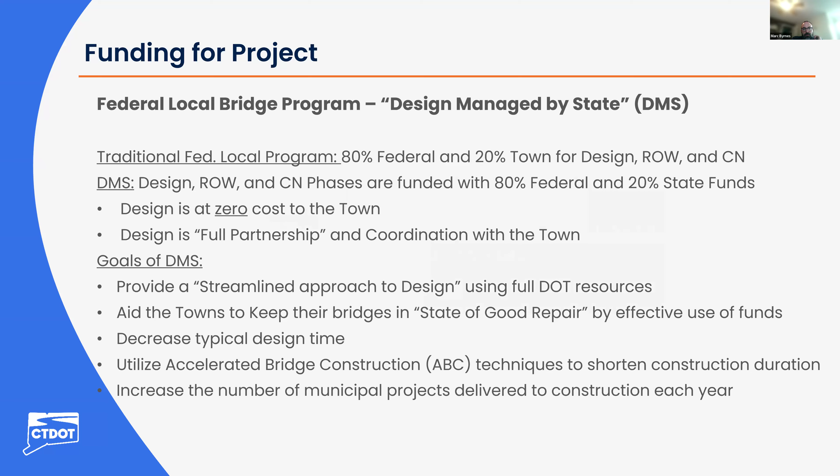I will now turn it over to Jack Healy, Public Works Director for the town of New Milford, for some remarks. Thank you, Mark. Good evening. Mayor Bass could not make the presentation tonight, so I'm going to step in for him to give the remarks. Welcome to this presentation for the Wheaton Road Bridge.

This would be the fourth bridge that we've partnered with DOT on in this fashion. We finished the Upland Road Bridge last year, and I think it was a very big success. It looks very good, and it was done per the schedule that Mark indicated. Again, this is at 100% federal and state costs - the town of New Milford does not pay anything for this. It's a very good partnership. We're able to accelerate the design and construction of these bridges.

We also have the Van Car Bridge and Sand Road Bridge currently going through the program. So the town of New Milford, at the end of the day, will have had 4 bridges in the last year up through 2026 go through this program. So we thank Mark and all of the team on this call for their guidance and helping us get these bridges done in a timely fashion at no cost to the town of New Milford. Thank you.

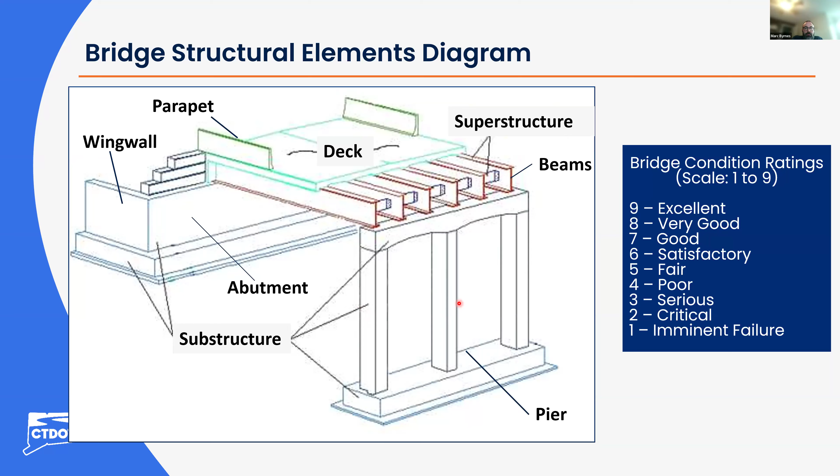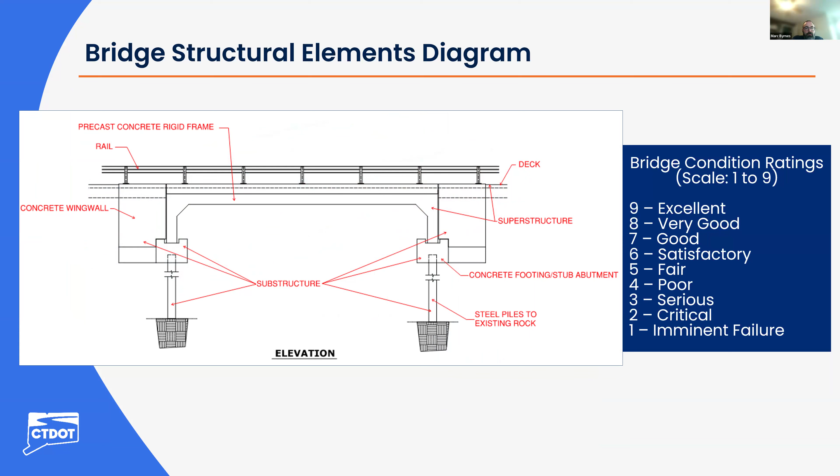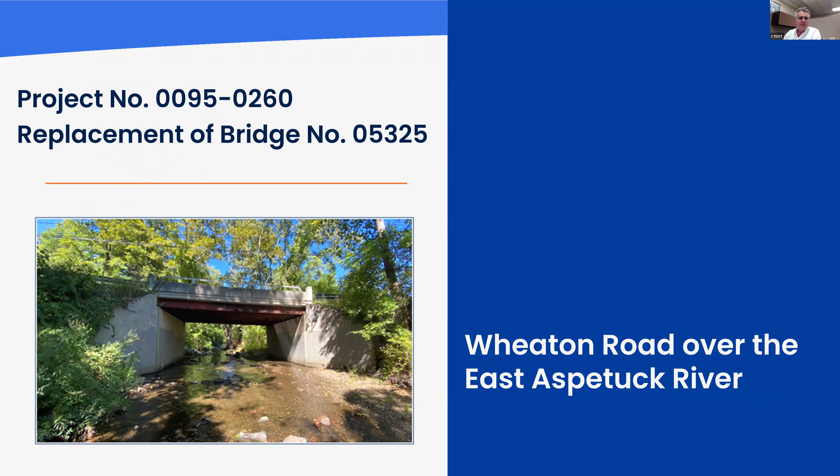Bridge 5325 carries Wheaton Road over the East Aspetuck River, about 300 feet east of US Route 202, which is also Litchfield Road. This bridge is also less than 50 feet east of Old Mill Road, which is a narrow gravel road along the west riverbank. Wheaton Road is functionally classified by the Department of Transportation as a local urban street.

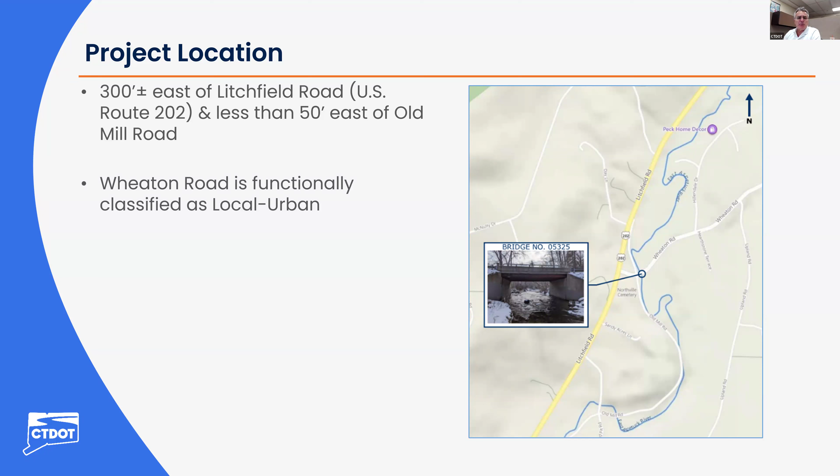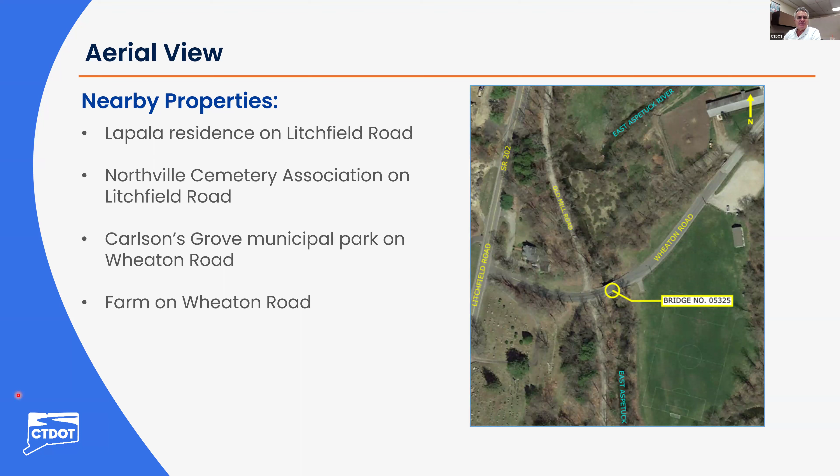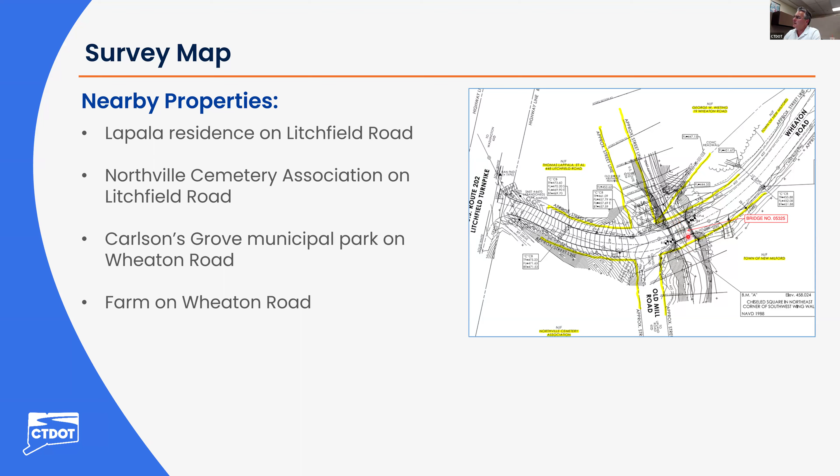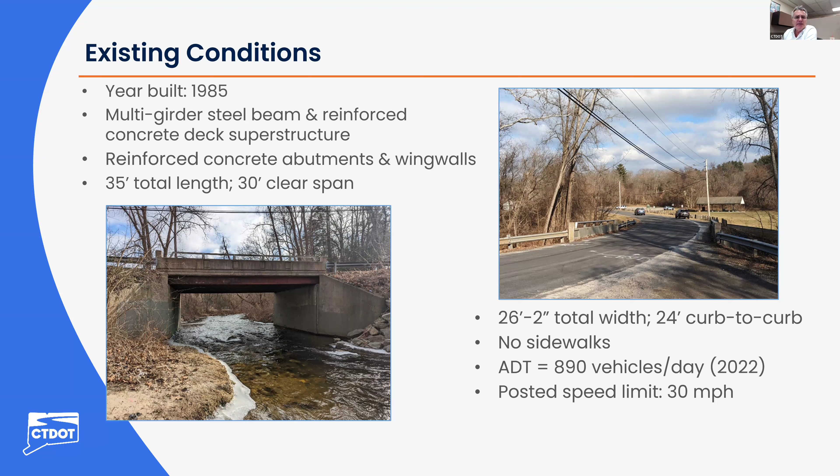There are no sidewalks on the structure or in the project area. The average daily traffic flow on this bridge is about 890 vehicles per day, and the posted speed limit on Wheaton Road is 30 miles an hour. In terms of existing utilities, there are some utility wires located directly over the bridge, just south of the center line of Wheaton Road.

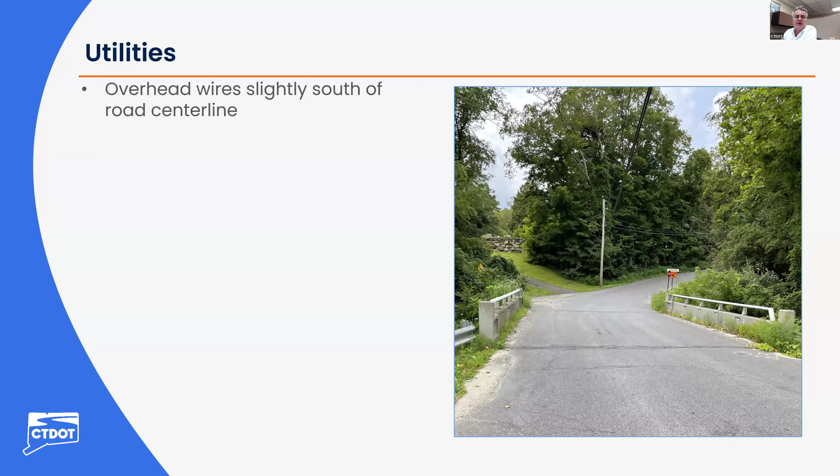In terms of the condition of the bridge, I'll talk about how the department sees this bridge. The approach is in satisfactory condition with a rating of 6. The metal beam railing along the approaches are damaged in a few areas, and the pavement exhibits some raveling and evidence of past chip seal application.

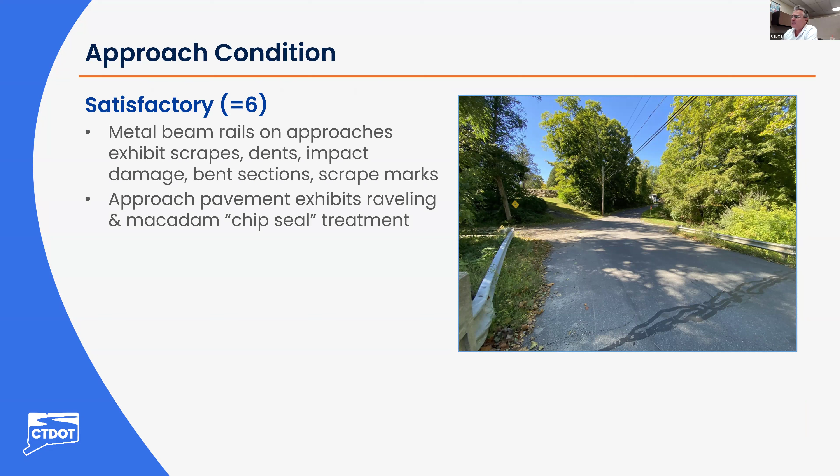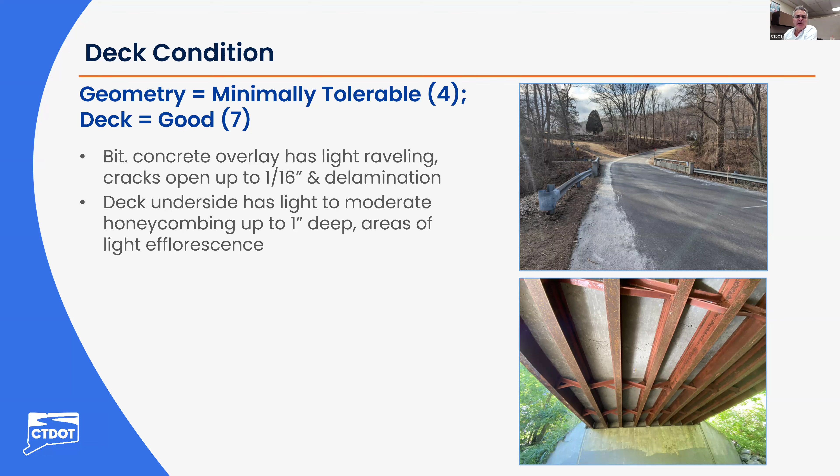The deck geometry has an appraisal rating of 4, meaning it's tolerable to be left in place as is. From a structural standpoint, the deck is in good condition. There are areas of light raveling and cracks in the bituminous concrete overlay, and the concrete deck underside has light to moderate honeycombing and areas of light efflorescence.

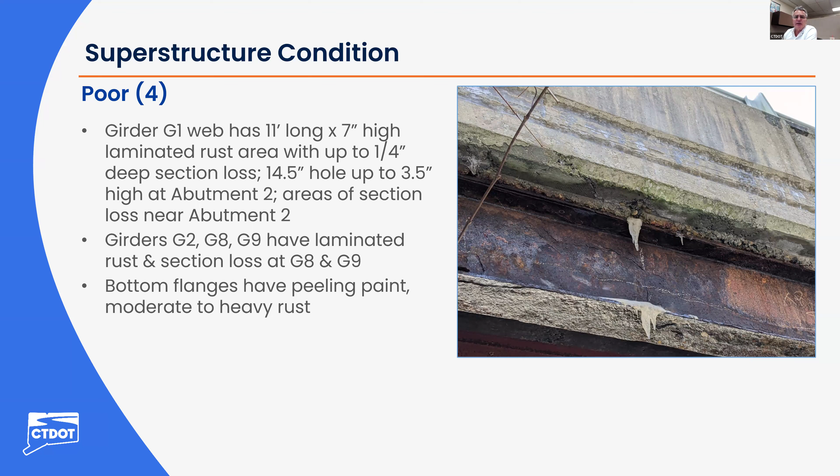The superstructure, however, is in poor condition with a condition rating of 4. Girder G1, shown in the photo, has an area of laminated rust 11 feet long by up to 7 inches high, with up to a quarter inch of deep section loss. This girder also has a hole in it, 14.5 inches long, up to 3.5 inches high, over the bearing at abutment 2.

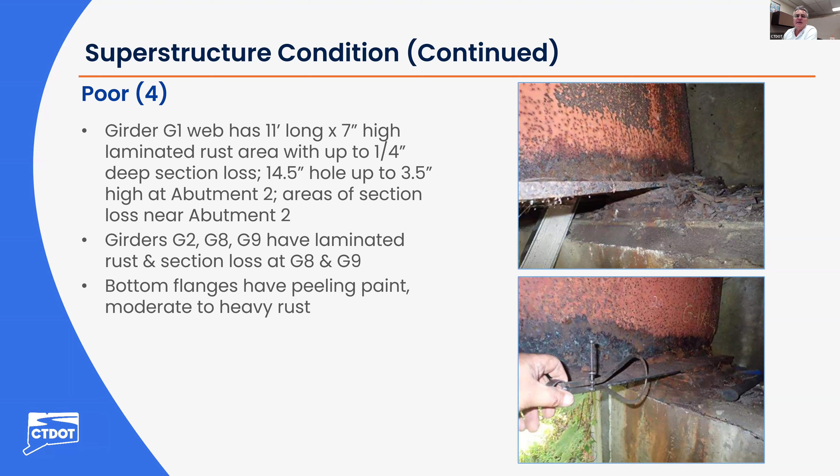Girders G2, G8, and G9 also exhibit areas of laminated rust, and a couple of these girders have notable section loss near abutment 2, and some of the bottom flanges of the steel beams have moderate to heavy rust.

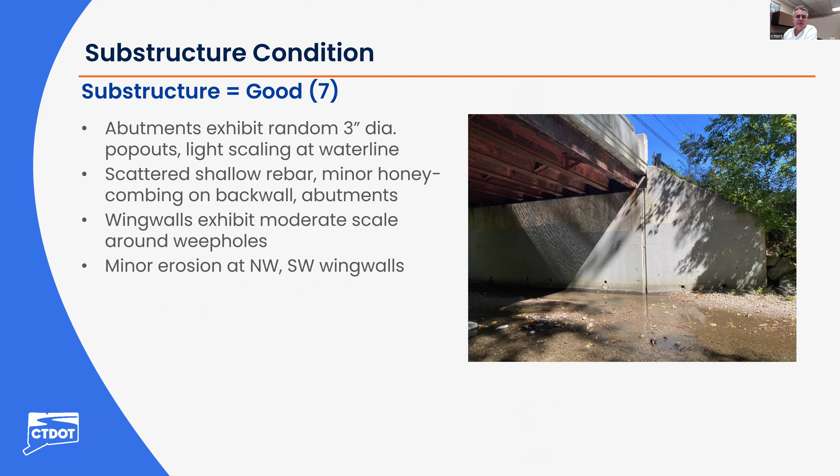The substructure, the concrete part that is in contact with the ground, is in good condition with a rating of 7. The abutments exhibit random pop-outs, light scaling, some shallow rebar, and minor honeycombing, and the wing walls exhibit moderate scaling and minor erosion. The channel rating is 6.

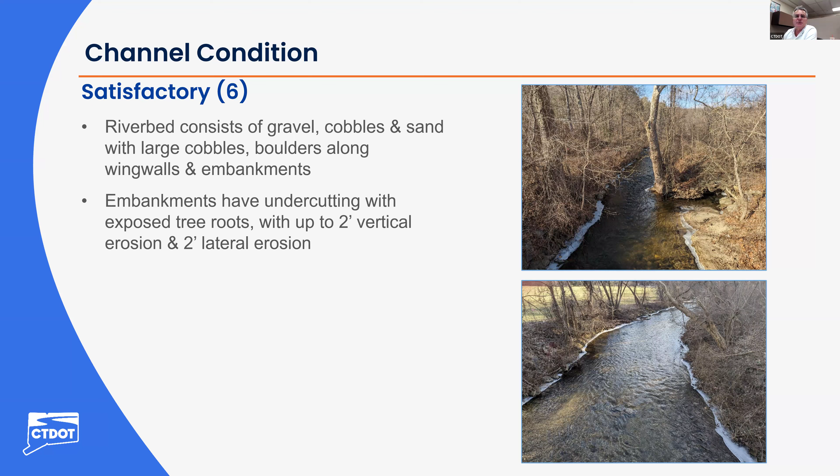The department's 1998 Bridge Scour Evaluation Report and its 2022 Inspection Report classify this bridge as scour critical based on unknown foundation conditions. The 1998 analysis noted scour evidence at both abutments and upstream, and contained a comparative scour analysis suggesting the bridge could be undermined in the future under certain circumstances.

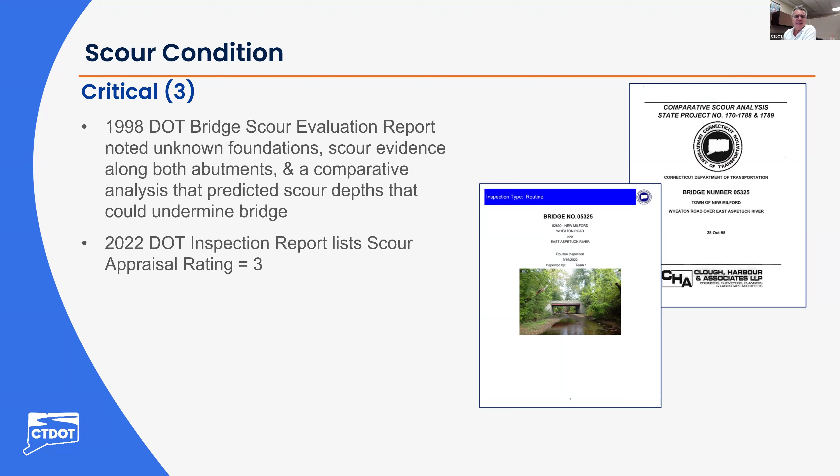The proposed replacement bridge consists of a concrete box beam superstructure on reinforced cast-in-place integral abutments. It would consist of 7 4-foot wide precast box beams overlain with a concrete shear slab, membrane waterproofing, and a 3-inch minimum wear surface. The concrete integral abutments will be founded on piles, and the wing walls will be cast in place.

The total structure length will be 69 feet. The bridge rail will transition to concrete end walls treated with concrete form liners. The minimum bridge curb-to-curb width will be 25 feet, to match or exceed the existing 24-foot wide roadway, and the bridge will carry 2 10-foot wide travel lanes with 2 to 3-foot wide shoulders. The overall out-to-out width will be 28 feet 6 inches, and the estimated initial construction cost is $2.265 million.

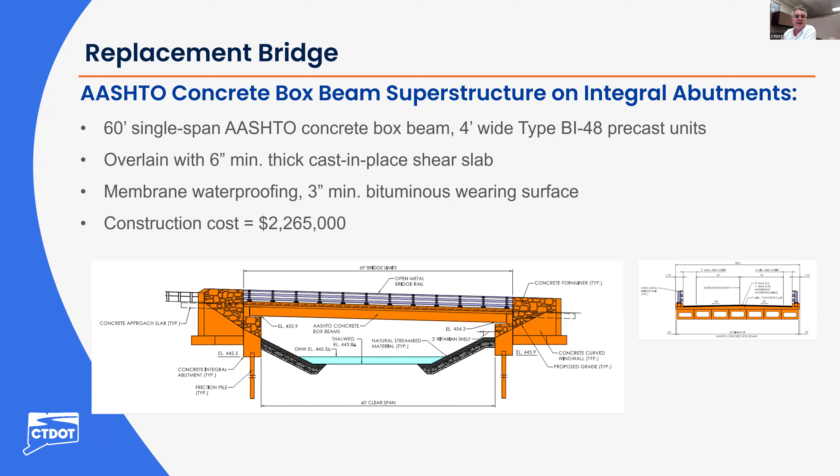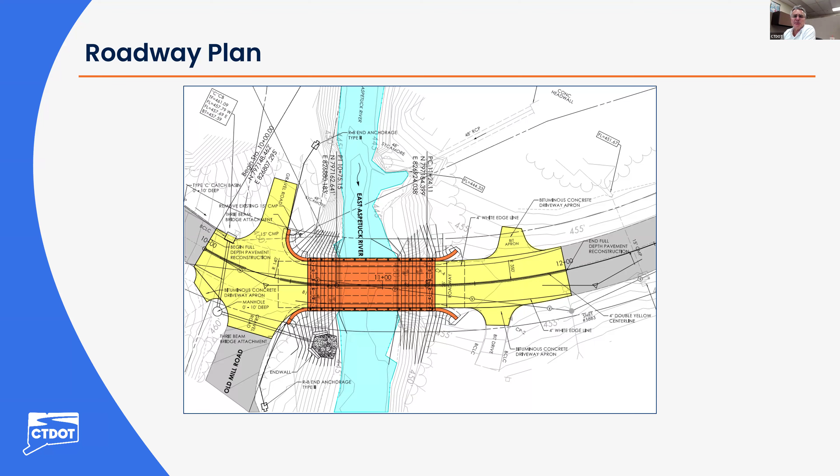The proposed roadway work includes construction of MASH-compliant guide rail on the west approach, meaning the guide rails will meet current safety criteria. There will be drainage improvements west of the bridge, and paved aprons for Old Mill Road and 2 driveways, shown in yellow. No sidewalks are to be constructed on the proposed bridge, as there are no existing sidewalks or municipal plans for sidewalks near the project site.

A portion of Wheaton Road will be closed during the bridge work, and traffic will be detoured for the 6 to 8 month project construction duration, from April to September, or possibly the end of November at the latest. The 2.3 mile, 5-minute detour will use State Route 202 and Upland Road, as shown in the graphic on this screen.

This proposed road closure will allow the contractor to finish the bridge work more quickly and economically, and it's also safer for the traveling public and the contractor's workers if motor vehicles do not drive through the work zone during construction.

Old Mill Road will remain a gravel road located north and south of Wheaton Road, except for the very small portions of paved aprons that will tie directly into Wheaton Road. The short segment north of Wheaton Road will be closed during construction since there is no place to turn around on it.

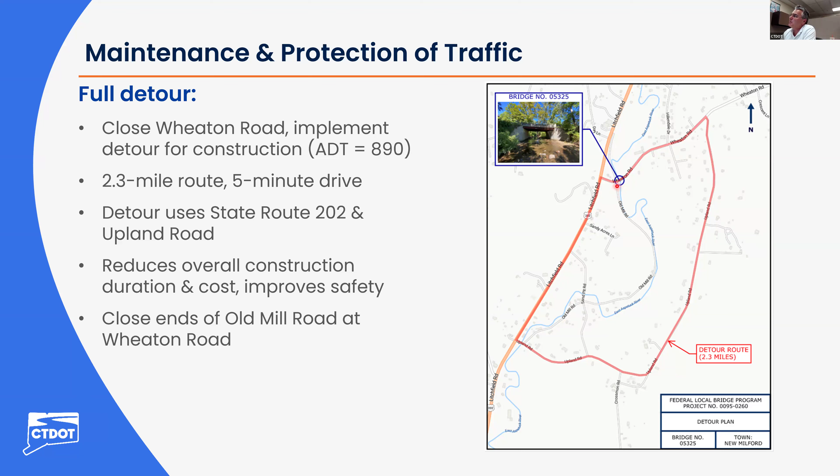The long segment of gravel road on Old Mill Road to the south, from Upland Road up to Wheaton Road, will remain open for the vast majority of its length, except for the northernmost 50 feet adjacent to Wheaton Road, past the turnaround. There's an existing round area where vehicles can turn around, and that will be where the road terminates during construction.

In terms of water handling, temporary coffer dams are anticipated to protect the water course during demolition of the existing bridge substructure, during pile installation, and construction of the new abutments. All that will be done in the dry, away from the water course. And then the embankments will be regraded.

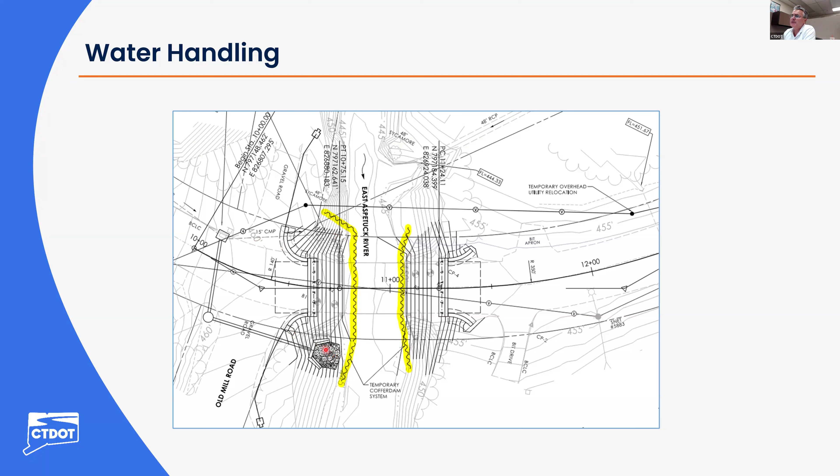Easements and rights to perform construction activities will be required for some of this construction work and for proposed drainage improvements. There's an existing catch basin with a pipe that heads off to the East Aspetuck River, and as part of this project, that pipe will be rerouted to the downstream side of the road.

A small take and drainage right-of-way will therefore be required to construct the drainage outfall near the southwest corner of the proposed bridge, and construction easements will be needed on the north and south sides of the roadway for bridge work, grading, and temporary utility relocation, which are shown on this slide.

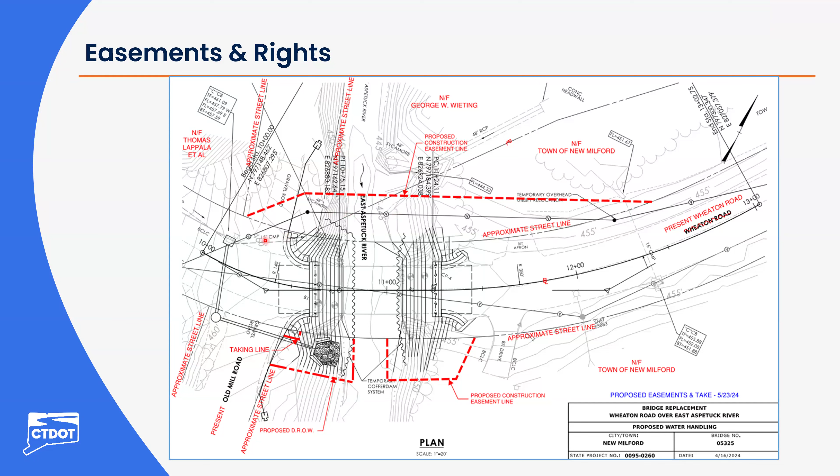The Connecticut Department of Energy and Environmental Protection did an initial review of this project. In terms of the natural diversity database, this project is not located near any mapped area of concern for state or federally listed species. The Connecticut DEEP Fisheries Group noted the presence of a diverse fish community in this river and favored the use of a single span structure such as what we're proposing here.

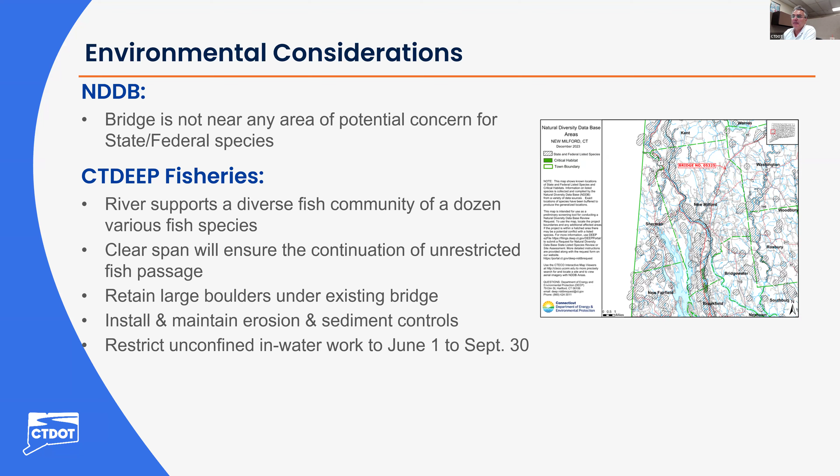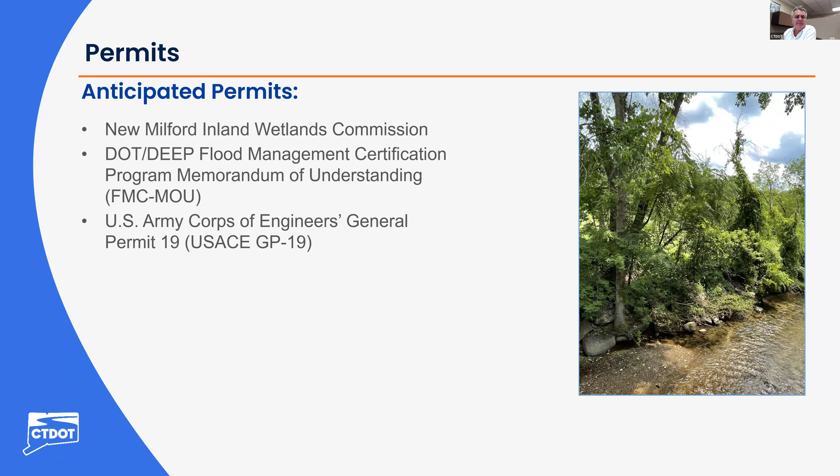Construction is anticipated to begin in the spring of 2026, depending on the availability of funding, acquisition of easements or rights-of-way, and pending approval of the local, state, and federal permits that I just talked about. The bridge work is expected to take 6 to 8 months to complete, and the town will be reimbursed for 100% of the construction cost.

I will now turn the presentation back over to Mark Burns at DOT to discuss rights-of-way issues. Mark? Thank you, Jim. So Zachary could not be here tonight, but he would speak to the right-of-way slides. Generally, the function of rights-of-way is to acquire all property rights necessary for the project.

Statutorily, we follow State of Connecticut CGS Section 13A-73 and 13A-98E, as well as the Federal Uniform Relocation Assistance and Real Property Acquisition Policies Act of 1970 as amended. Impacts on property can be partial acquisitions, easements, or rights. If there are any impacts to private property, the Division of Rights of Way will contact the property owners directly to work through the acquisition process. That's all I have at this point. Thank you.

Well everybody, I'll let you know I've been monitoring the email and the telephone message number, and we have no questions that I have received.